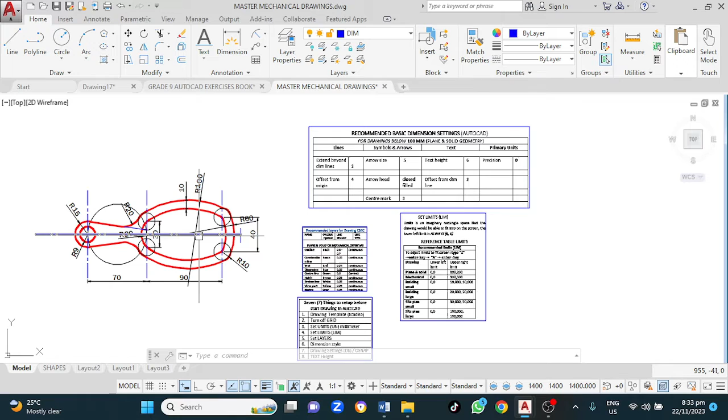Welcome back. In this new YouTube video, I will be showing you how to draw this figure, applying mainly circles to draw this command.

Of course, before we get started, there are 7 things that we need to do. The first thing is to open our drawing template, and that is a 4-step process.

The first step is to click on Big A, then go to New, then choose ACad ISO, then Open. Or if you have a custom template, you would use that.

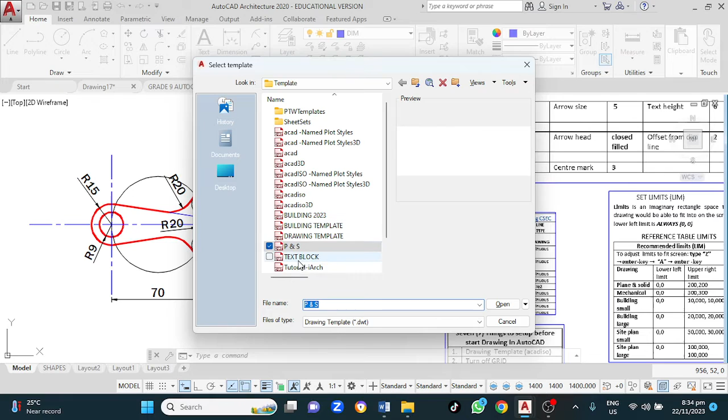The next thing you need to do once you have done that is to turn off your grid. Then you need to set your unit, and for that you type UN and enter.

Then set your limit. Here's a reference table which shows the various types of limits. Remember that the lower limit is always 0,0, and the shortcut key for limit is LIM. The standard limit for plane and solid geometry is upper limit 200 by 200, and for mechanical drawing, upper right limit is 300 by 300. For larger drawings, like buildings, we typically use 10,000 by 10,000.

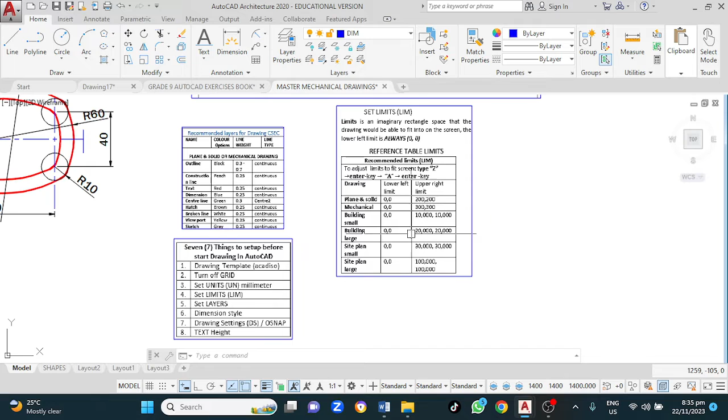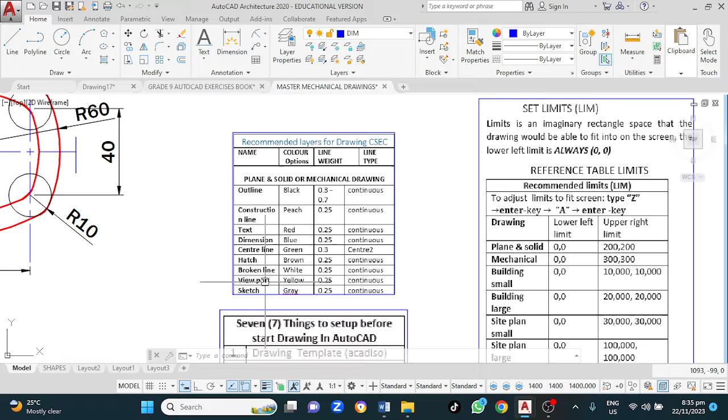Now, once you have done that, you will also be required to set up your layers. These are some of the layers you need to set up: outline, construction layer, text, dimension, center line, hatch, broken line - and those are pretty much the basics. If you want to go a bit further and set viewport and sketches, fine, but those are the basics.

So these are the 7 things that you must set up each time you draw. You must also set up your layers, and you must also set up a dimension style, and the shortcut key for dimension is D.

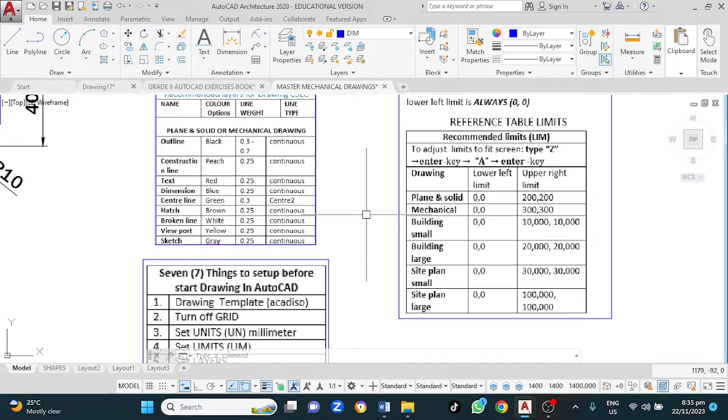This is a basic table of the limits and things that you should set up in your dimension setting. Under lines, you want to ensure that extend beyond dimension line is set.

Offset from origin is also set at 4. Arrow size can be between 4 to 6. The arrowhead, we typically use closed fill, and your centre mark, if you have a circle, that can be between 3 to 4. Text height, somewhere between 5 to 6, and offset from dimension line, approximately 2.

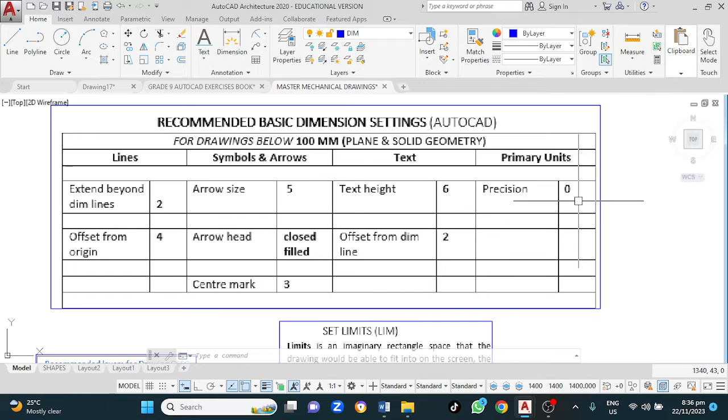Now, you want to ensure that your precision is set to 0. If this is not set to 0, you will get some 0.000 millimeters, something that we typically do not want. So once your setting up has been done, you're good to go.

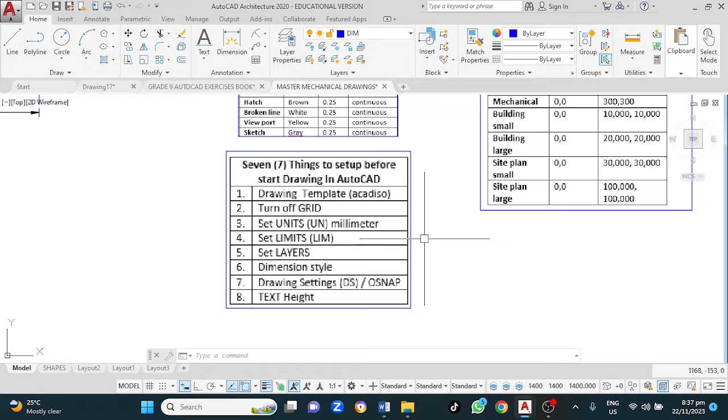Now, for your drawing setting, or your object snaps, you want to ensure that your node is ticked, midpoint is ticked, quadrant is ticked. Those are very, very useful. Those drawing settings will help us to draw much faster.

Now, let us look at this drawing. For this example, I will be applying mainly circles. So the first thing to do here, looking here, we have one center here, one center here. Between this center and that center is 70. Between these other 2 centers, we have 90.

So the first step is to turn on my construction layer. Now that is done, as I said before, I will be using mainly circles. So for that, I'll be using a circle to establish these 2 centers, using circle 2P.

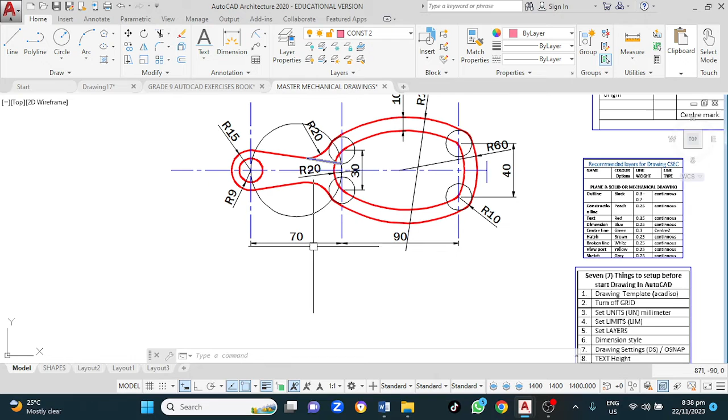So C for circle, enter. I want a 2-point circle, 2P. So I'll left click here for my start point, then type 70, enter. So this has been established.

Now I will be taking advantage of quadrant, which will allow me to snap onto this end, that end, top, and lower end. I then hit spacebar to reactivate my command, then left click here to specify my center. The command bar then asks me to specify radius. In this case, I want a radius of 9.

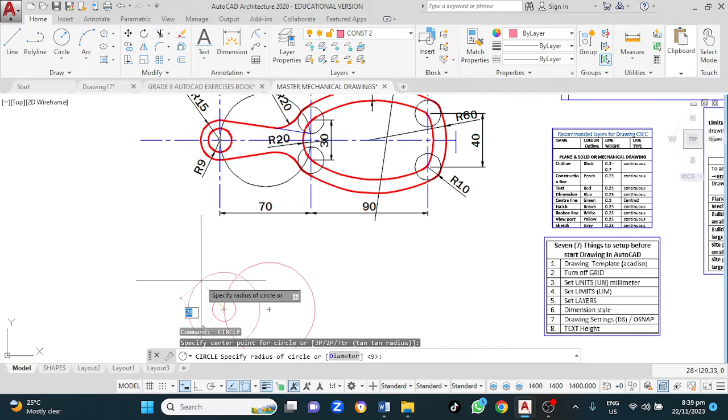So I type 9, enter. That's done. I hit spacebar to reactivate and go here again. This time I want a radius of 15. 1, 5, enter. That's done. Now that part is done.

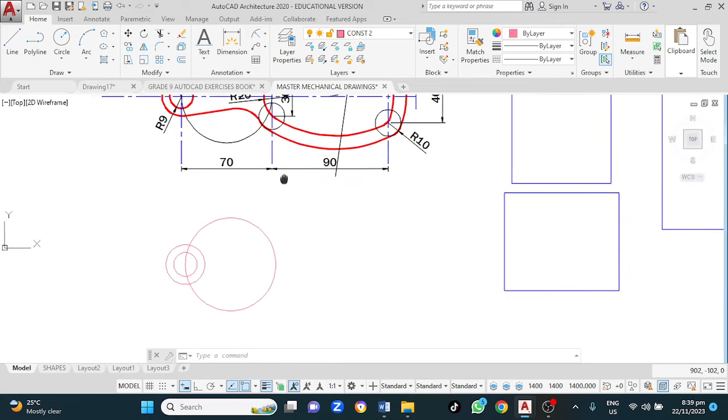Now onto this section right here. I need to establish the center for these two circles. These centers are located 30 millimeters apart. So for that, I'm using a regular circle. C again for circle, enter. Left click here for my start point.

In this case, I want a radius of 15. So I type 1, 5. Or please note that you could enter the radius like this: 30/2, enter. What that does is divide 30 by 2 to give you a radius of 15. Just another advanced tip for you.

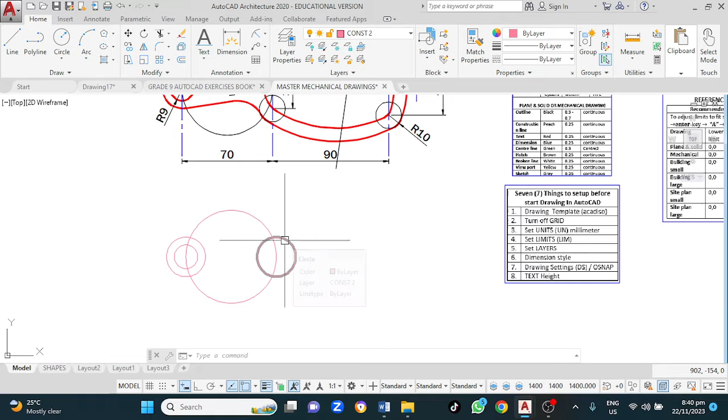Now we have established the centers here. It's now time for us to draw this circle right here, this one right here, these two little circles here. But I don't know the radius for this, so let me dimension that up. Left click here, that is 10.

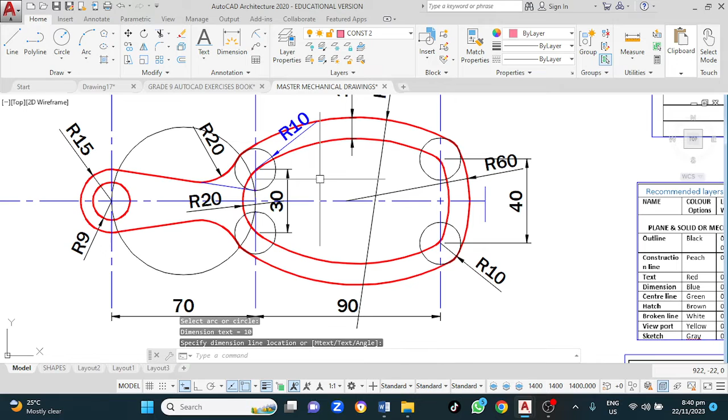Alright, so I'm going down here. C for circle, enter. Left click here, radius is 10, 1, 0, enter. Space bar to reactivate. Left click on the quadrant here, 1, 0, enter. That's now done.

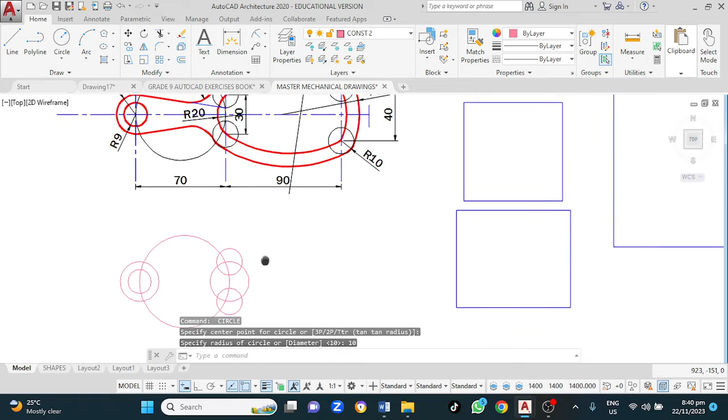The next step is to establish our center from here to here. Now, some persons might use a line, but as I said before, for this example, I am using only circles. So of course, I could use a line if I want. Come here, from here, draw a line out 90, 90, enter, enter. That is one way.

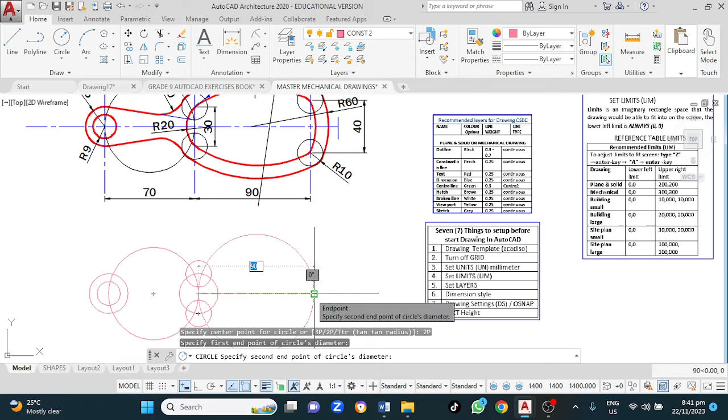Or I could use my circle. C, choose 2 points, left click here, then go here, there, 90, same thing, same difference. All right, same difference. So let me delete this and then just complete this part so you can see how this thing looks.

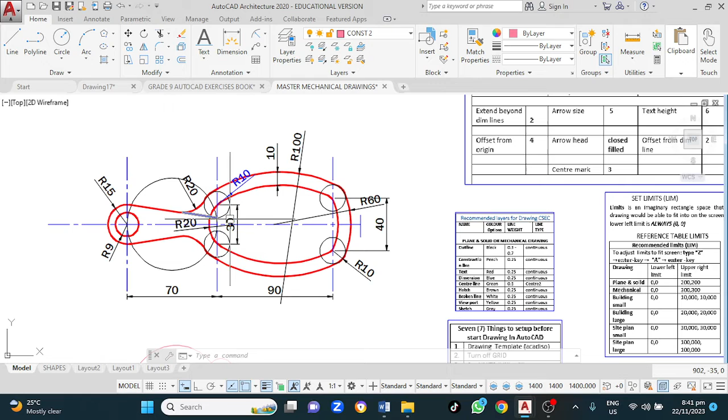Now to draw this arc, we are going to join this. There's a tangent from here to this right here, tangent right here to get that point. So I'm going line, L for line, enter. When it asks to specify the first point, I type TAN for tangent. TAN, enter. I then left click on the circle.

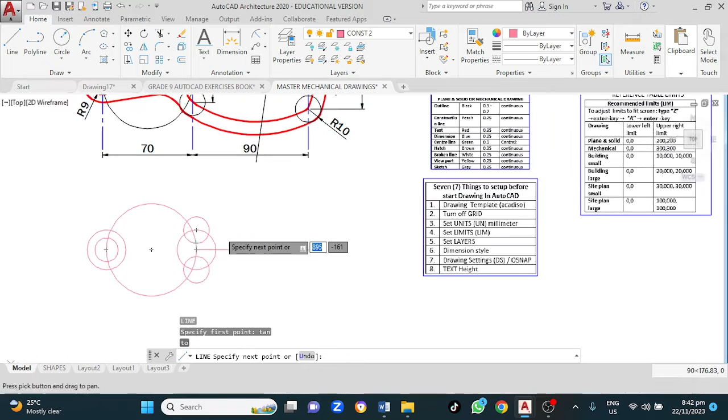Then I type TAN again, enter for tangent. Then left click someplace down here. That tangent is drawn. That is drawn. I could mirror this or I could redraw this.

What do you want to do? Should we use mirror or should I just redraw it? Let me use mirror. To mirror, I type MI for mirror. Left click to select object, then enter. I then left click here as one mirror point, left click here, second mirror point, enter. That is now done.

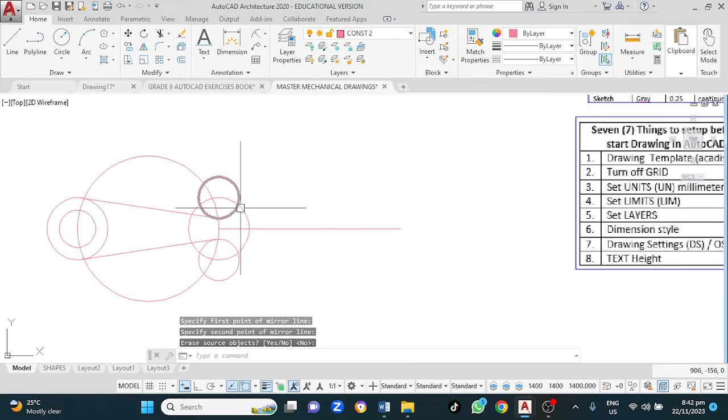So this part is partially formed, this part. I could then trim out here to bring this to life. TR, enter, enter, left click here, that part is done.

Now if we look up, if we look here, there is a radius here, a radius of an arc here of radius 20. So what I could do, I could use fillet to do it, or I could use circle tangent radius. Let me use fillet.

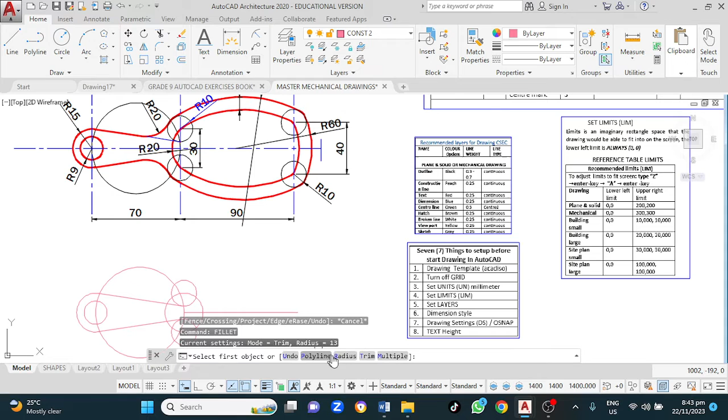F for fillet, enter. Type R or click on this to change radius. In this case, I want a radius of 20. So I type 20, enter. Then zoom into this. Left click here, left click here. That is done.

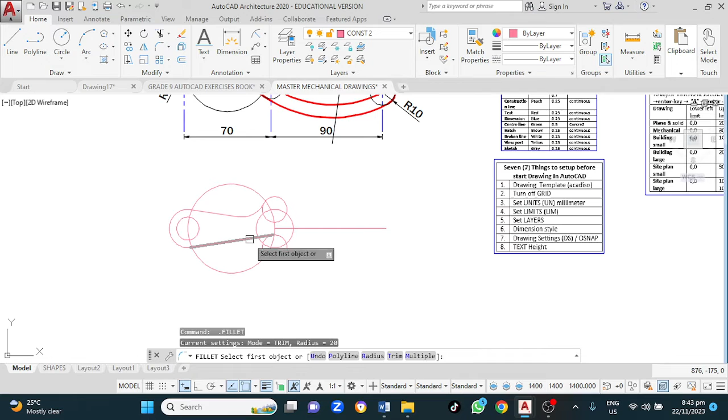Spacebar to reactivate. Left click here, left click here. That is done. So this is now created. See, this arc is now created. A piece right here.

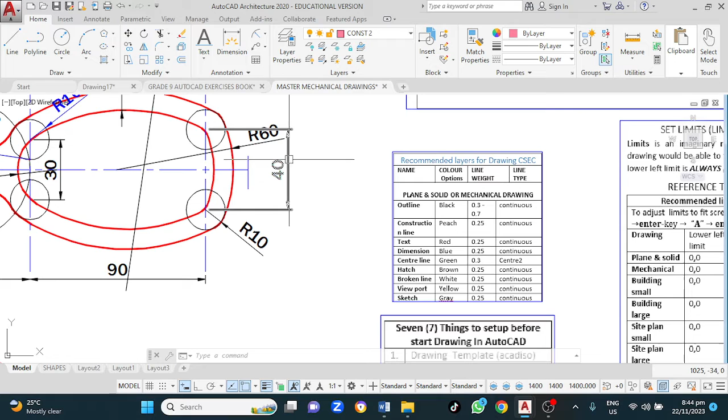Now that is done. Our next step is to establish the center here. This center is from here to here is 40. So again, I could use a line or I could use a circle. I'm going to use a circle.

C for circle. Or should I use line? Okay, Chris, use line. Alright, line, L, enter. And I left click here, go up, turn on ortho, type 40, enter, enter. So I draw this at some convenient place on the drawing. I then left click here to highlight it, then left click and hold and drag and drop it right there. That is done. That's one way of doing it.

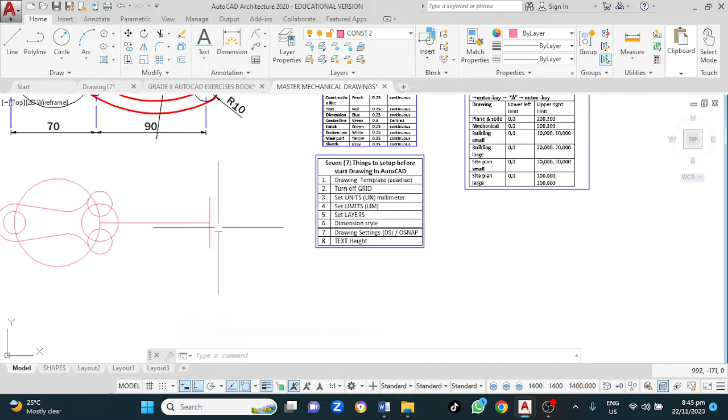Yeah, but I love to use circle. I think circle gets it done much faster.

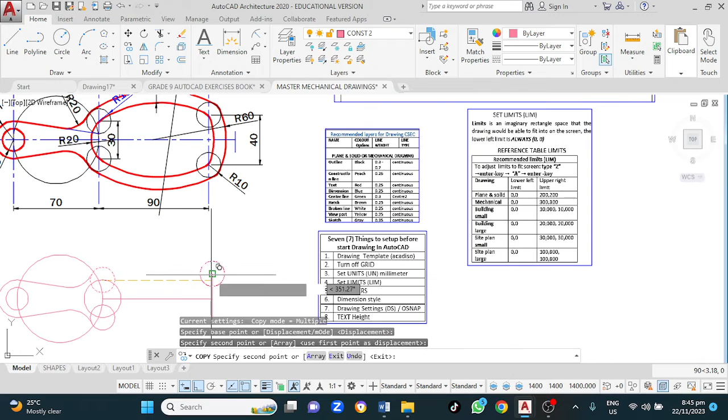Our next step is to establish these circles. One circle here, one circle there. Or I could just simply copy this. Left click here, Ctrl for copy, enter. Left click here, drop that there, drop that there. Escape. That is now done.

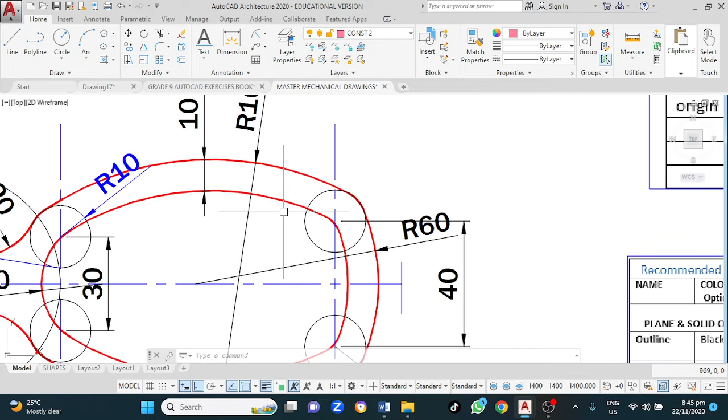My next step is to draw this radius here. Draw this arc. This arc has a radius of 100. So for that arc, circle, tan radius. C, enter.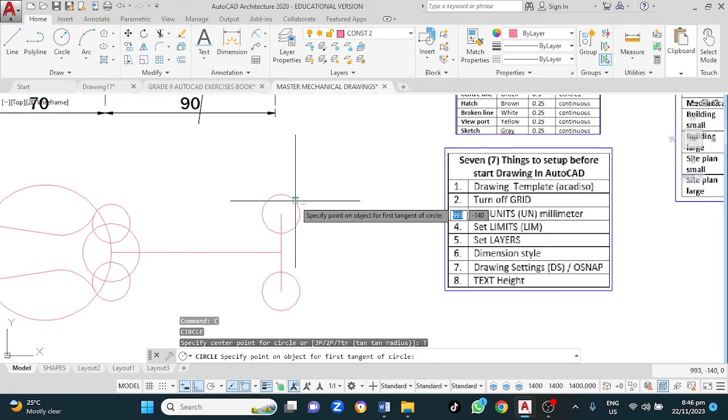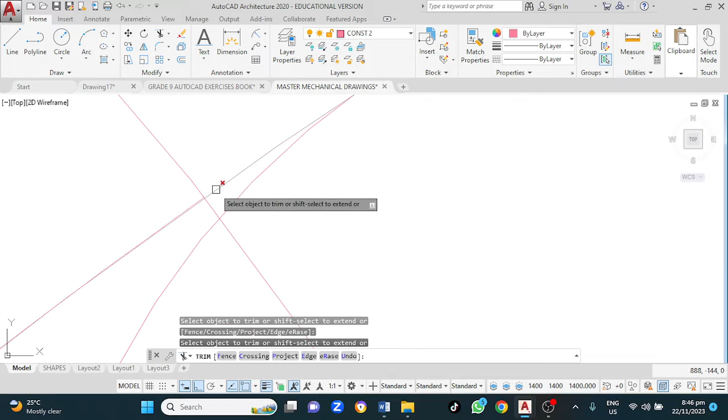Tan radius. Click this, then go back to the drawing. Left click this circle, then left click this other one. Go down here and enter 100, enter. That is now done. I then trim: TR, enter, enter. Left click out here, left click here, escape. That is now done. Delete. That part is now done.

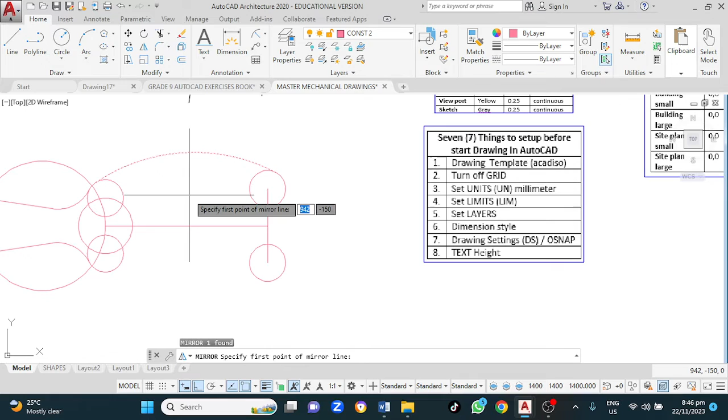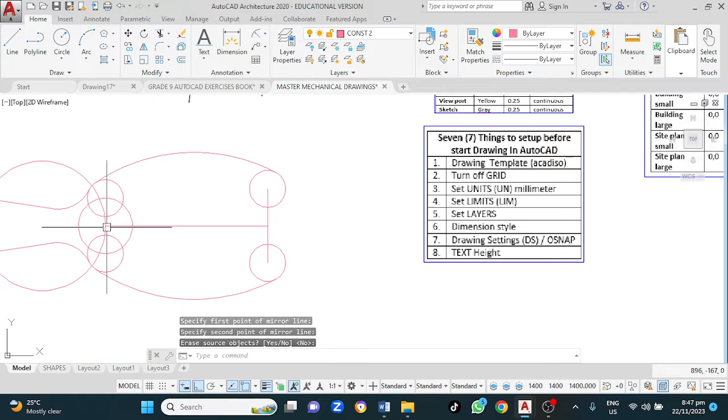Now I could simply mirror this. To do that, I left click this, then type MI for mirror, enter. Command bar says specify the first mirror line. The first mirror line is right here in the middle. Second mirror point is right here in the middle. It then asks, do you want to erase the source object? I press no, do not erase it, by pressing the enter key. That is now done. See, we're getting it.

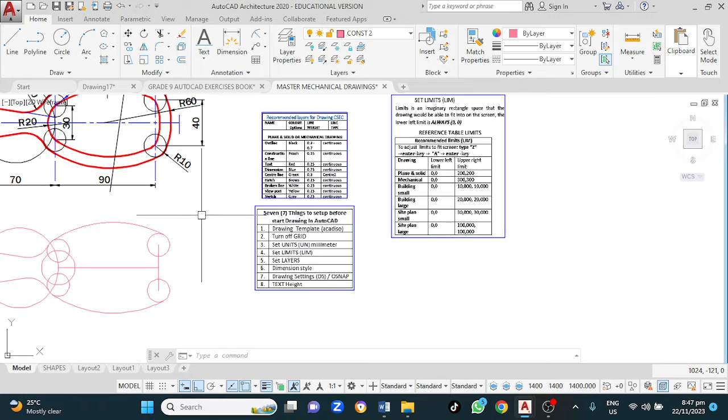Now onto this part right here. To get that part, we're gonna use tan radius again, except for this we are using a radius of 60. So we go back up, C, enter, click on tan radius, and we click one tangential point here, second tangent point. We then move the crosshair towards the center, then type 60, enter.

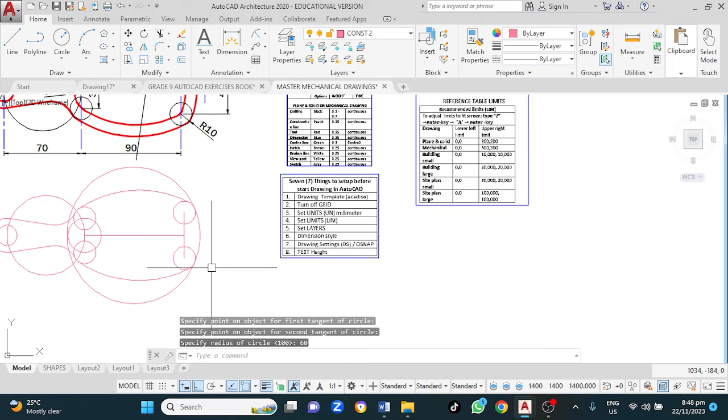Now that is done. My next step is to clean this up by typing TR, enter, enter. Left click here, go up, and that is now done.

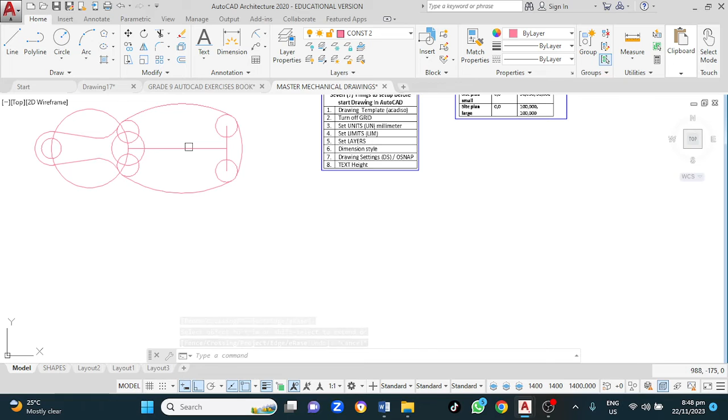Yeah, now that we have done that, our next step is to offset this, or we could draw another circle. We could offset this by 10. Yeah, offset this by 10.

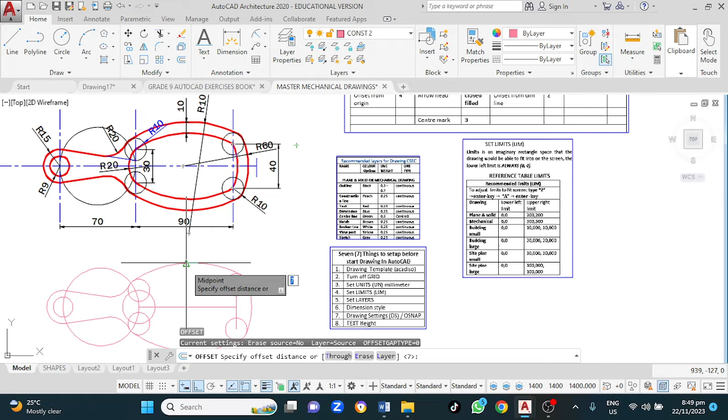So we go over to offset, enter. Offset distance is 10. We could use offset, we could copy, we could also use copy. Alright, offset might pose a little challenge here as it relates to the end of these. So what we could do is just draw a circle of radius 10 and then offset this in towards that. Probably could do that.

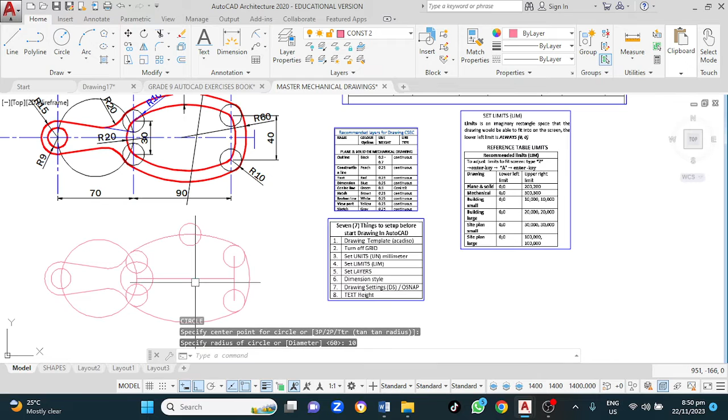Alright, let's see how offset works on this. In this case, it's good to use a draw circle. C, enter. Click here. Radius 10, 1, 0, enter. Space bar. 1, 0, enter. And 1 for this again, space bar. This should be 10 as well. 1, 0, enter. Then I'm going to offset this.

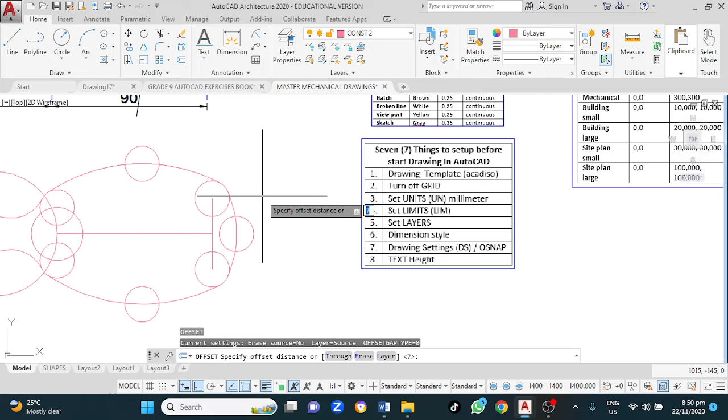But I have over offset, enter. T, enter. Click this, enter. Over offset, enter. Click this. Enter to accept through. And then bring this down there. That is done.

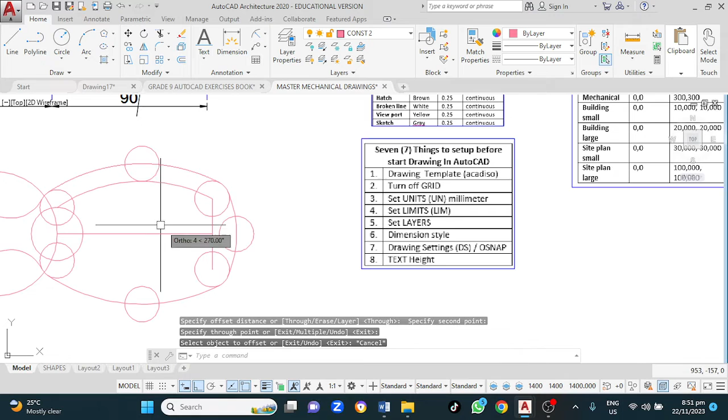Space bar to reactivate. Enter. Click this. That there, that is done there. Space bar to reactivate. Enter to accept through. Click this. One, 0, enter. And that is done. That's like that.

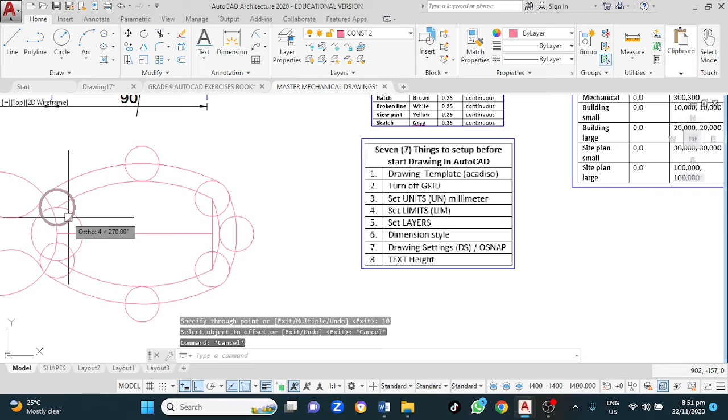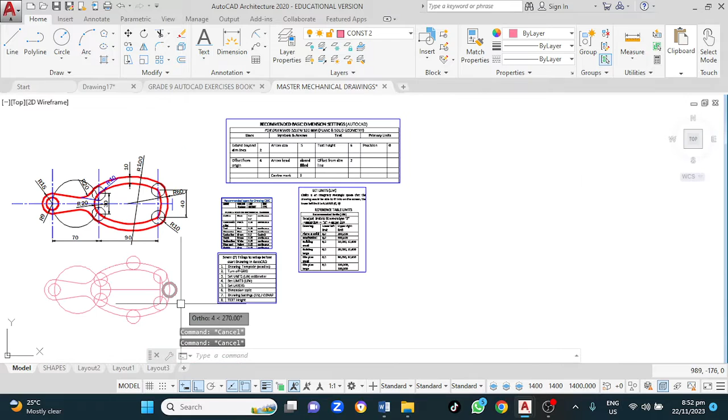And I probably should have drawn one here. Draw an arc right here, and that's what's going on up here. Okay, we use start and radius to get that part. Alright, so this is pretty much done right here.

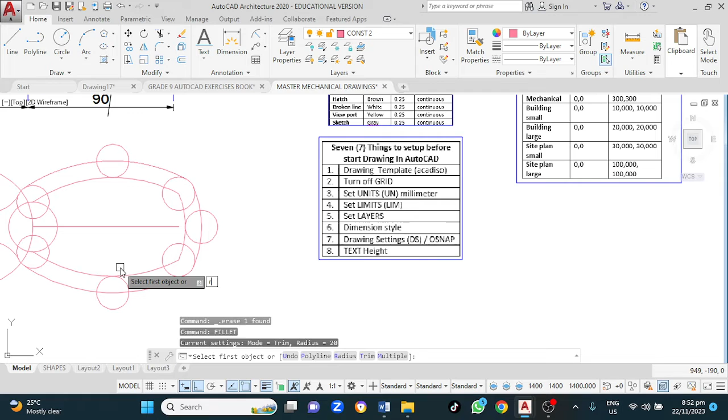Now I could use a fillet radius here, fillet this to get that nice and smooth. So use fillet, I'm gonna erase this line first. I'm gonna use fillet: F for fillet, enter. R, enter, 10, enter. Click this, click that, that's now cleaned up. Space bar to reactivate. Click this, click that, that's now cleaned up.

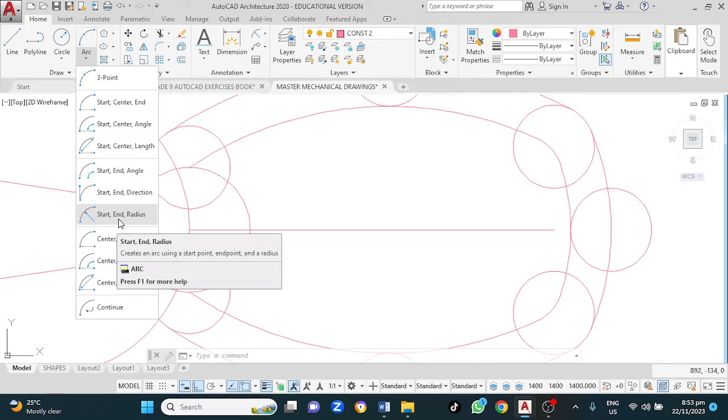And to go up here, I'm gonna use arc, start, end, radius. Go up to arc, start, end, radius. Arc, start, end, radius. Start here, end here, and the radius is I think 20. 2, 0, enter. That's now done. Yep, that is now done now.

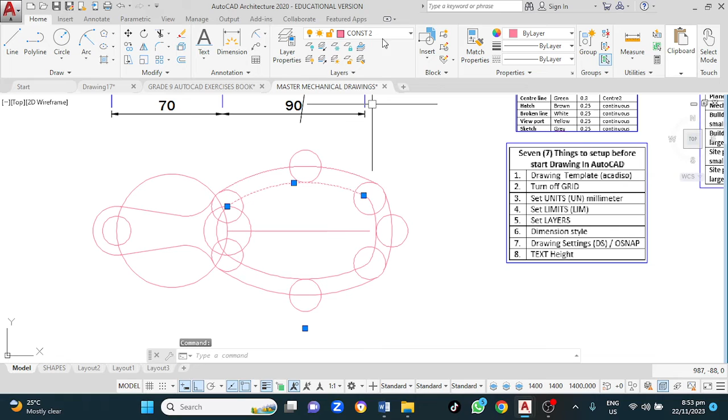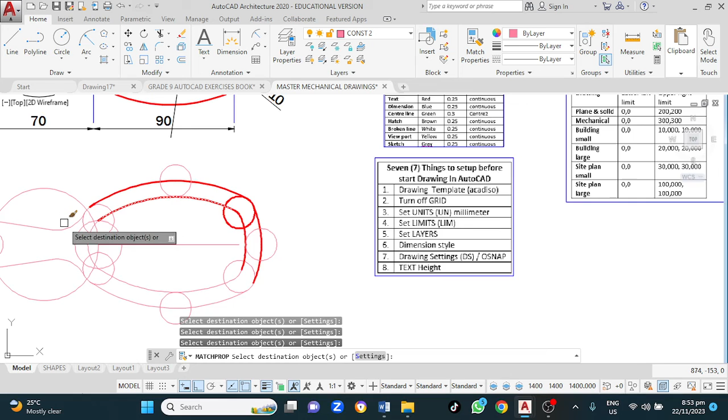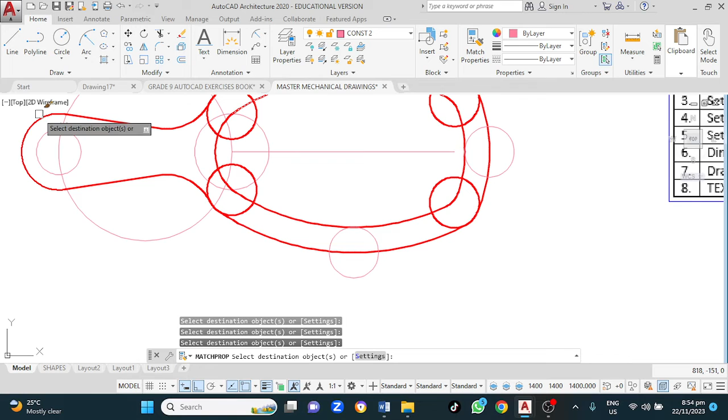So we have that. Was this complicated or not, or is it easy? Now I'm going to change this to the outline layer. I left click on that one, then go up to this drop down, click outline, then use match property: MA for match property, enter, click this, then touch, touch, touch this, touch that.

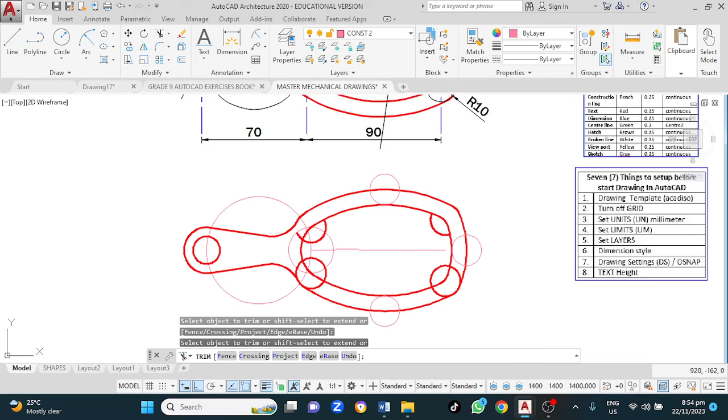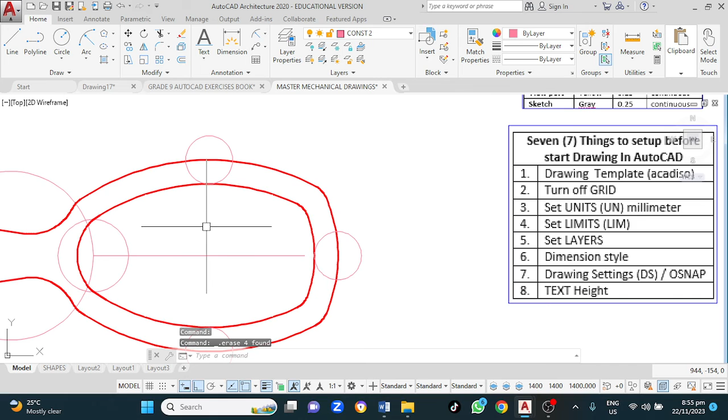And that is now basically done. I'm gonna trim this, enter, enter, left click, left click. And that is that. That is that, yeah. That is that. So next step will be to dimension this up. Of course, I will not be going to the dimension right now in the essence of time. So that's how that is done.

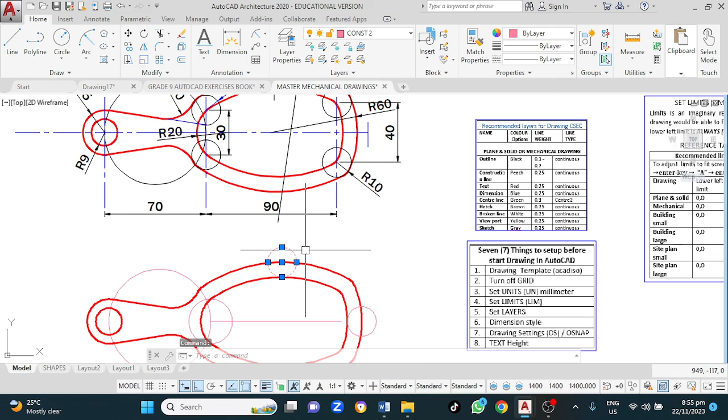Yep, we could copy these. Copy these. Probably not. We could copy those. So that's how it's done.